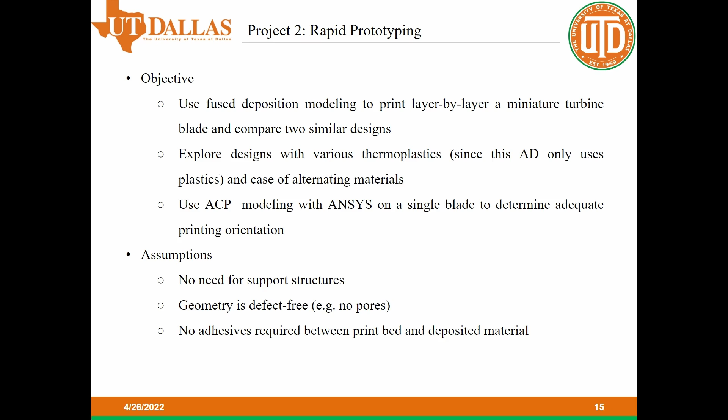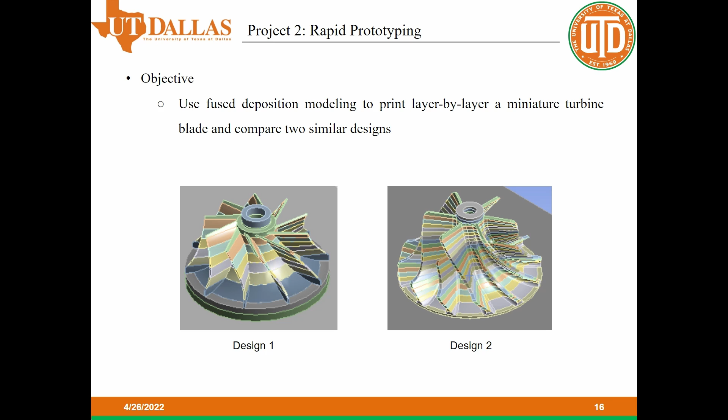Our assumptions going into this include no need for support structures, defect-free prints, and no adhesive required on the print bed. Here are the two different turbine geometries we tested, with Design 2 being a bit more complex, with alternating full-length and half-length blades. Design 1 is composed of 10 layers, while Design 2 is composed of 24 thinner layers, and this will be notable later on.

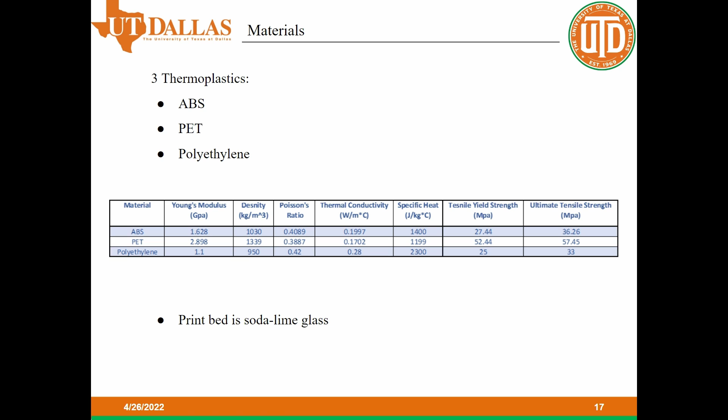The three thermoplastics we tested for the turbine composition are ABS, PET, and polyethylene, whose material properties are given in this table below. And the print bed itself is made of soda lime glass. Additionally, we tested alternating layers of ABS and PET for each design, and this actually gave some pretty interesting results that we'll see in a moment.

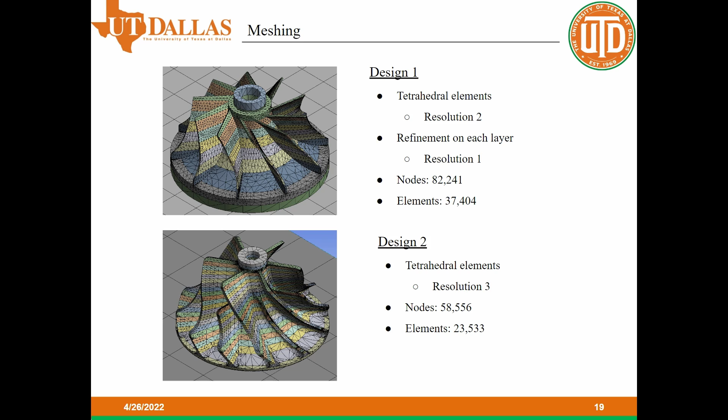The meshing strategies of Design 1 and 2 are somewhat different. They both use a tetrahedral mesh, but Design 1 has mesh refinements done at every single layer. Because Design 2 has more than twice as many layers, that same layer refinement could not be done due to the nodal limitations of the student version of ANSYS. However, we did increase the overall mesh resolution and ensured we had at least two elements across any thickness.

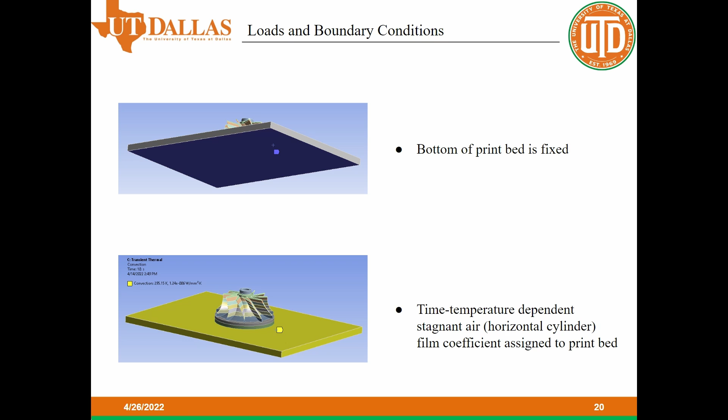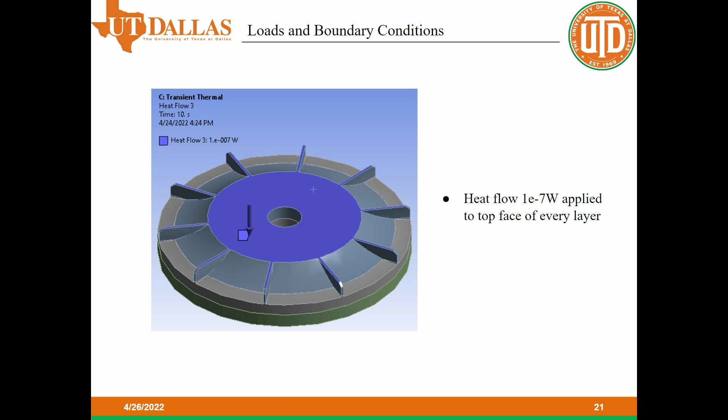For boundary conditions, the bottom of the print bed is fixed, and the stagnant air horizontal cylinder convection coefficient is assigned to the print bed. And these are the same for both Design 1 and 2. Our thermal loading is a heat flow of 1e-7 watts applied at every layer, and again, this loading method is the same for both Design 1 and 2. The FDM process was simulated using element birth and death relationships, and this animation shows the layer-by-layer addition of material.

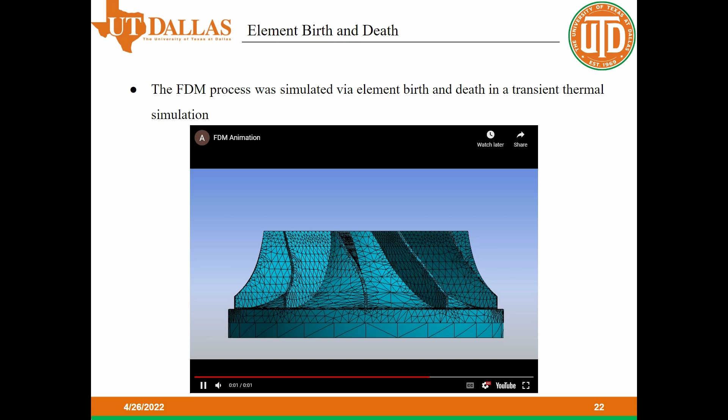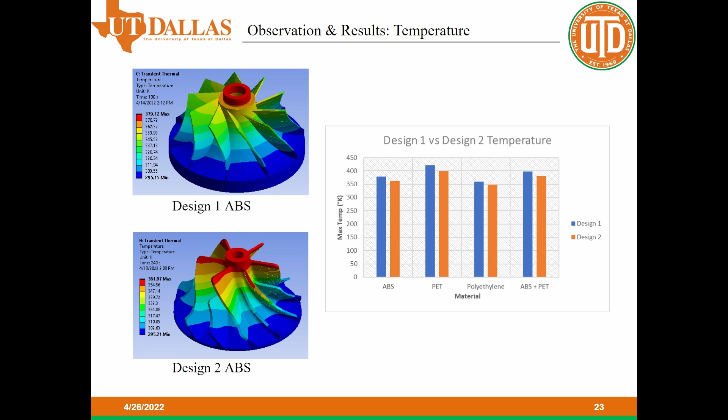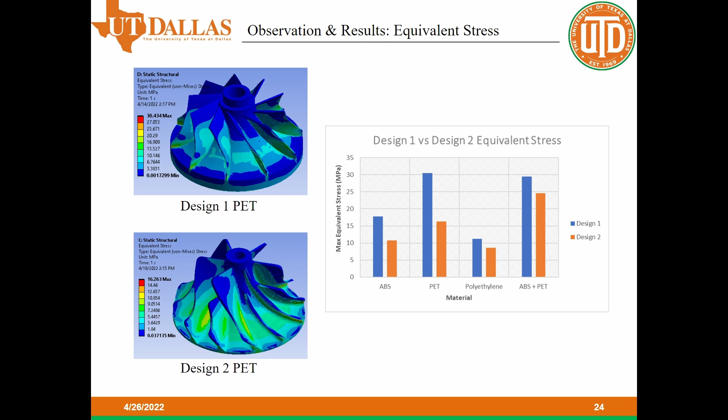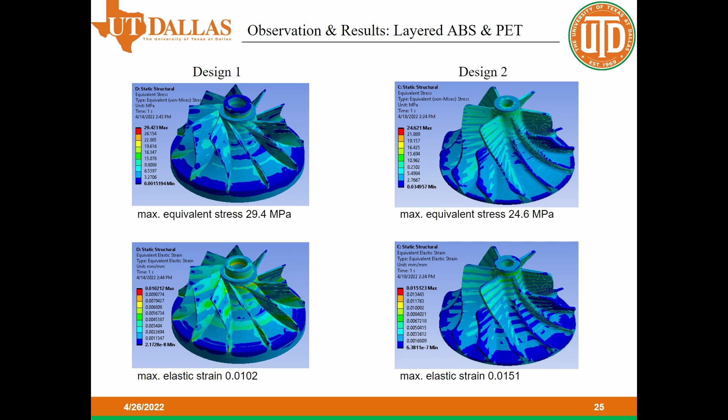The most interesting contours are the stress and strain plots for the layered ABS and PET turbines, with Design 1 on the left-hand side and Design 2 on the right. Design 2 has a slightly lower equivalent stress, but its elastic strain is 48% higher than Design 1. This is because ABS and PET did not experience the same amount of thermal expansion during the birth and death process.

This is an exaggerated view of the normal stress in Design 2. Every PET layer is under compression, while every ABS layer is under tension, and this is the result of their differences in thermal expansion. This effect is more pronounced in Design 2 because it has more than twice as many layers, so there are more than twice as many transitions from this tension to compression.

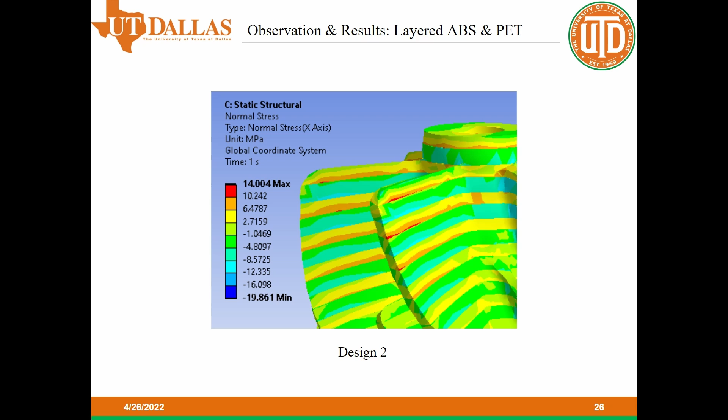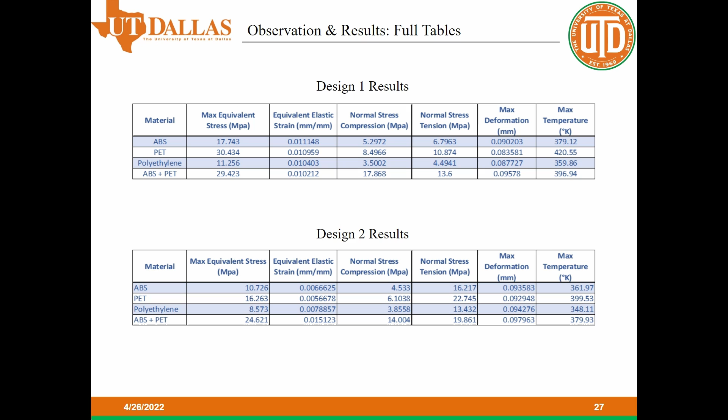The remaining results are tabulated in these two tables, and we included the maximum equivalent stress, tensile and compressive stresses, elastic strain, deformation, and temperature. In determining the best design and material, we chose to compare the safety factors of each combination. When comparing the same materials, Design 2 had the highest safety factor in every case. Of the Design 2 options, PET had the highest safety factor at 3.22, so Design 2 made of PET is our recommendation for the rapid prototyping application.

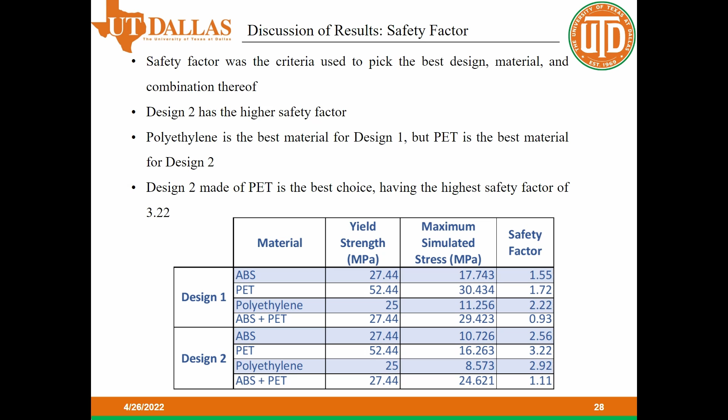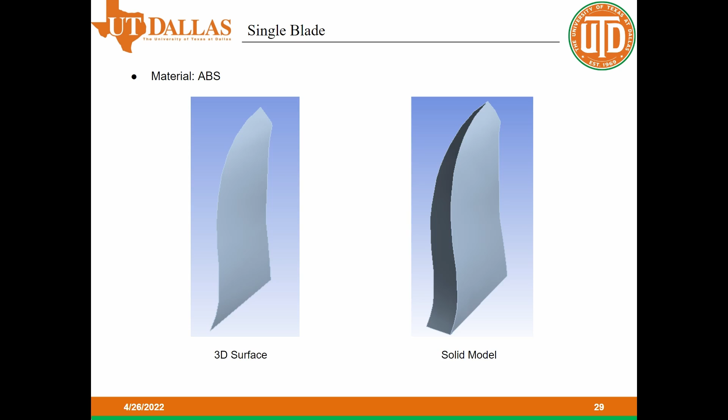We also experimented with the printing orientation on a single blade from Design 1. We were first given a 3D surface, which we extruded to a thickness of 1 millimeter. Using the ACP pre setup in ANSYS, we sliced the blade into 4 layers or plies of uniform 1/4 millimeter thickness. Using the symmetry option in the stack-up resulted in our ply angles going 0, 90, 90, 0, rather than alternating, but this was easily fixed by manually assigning the desired angle to each ply.

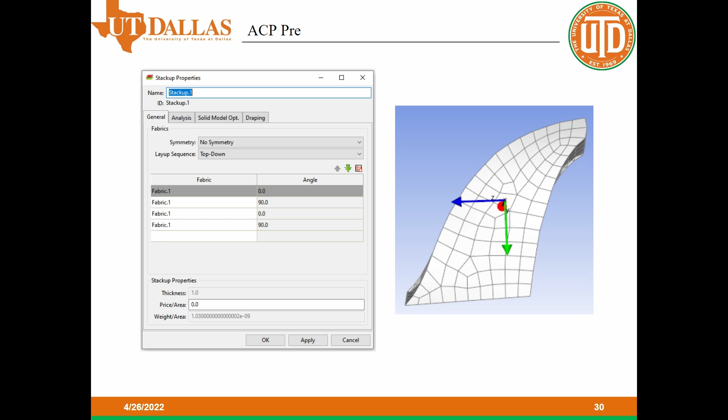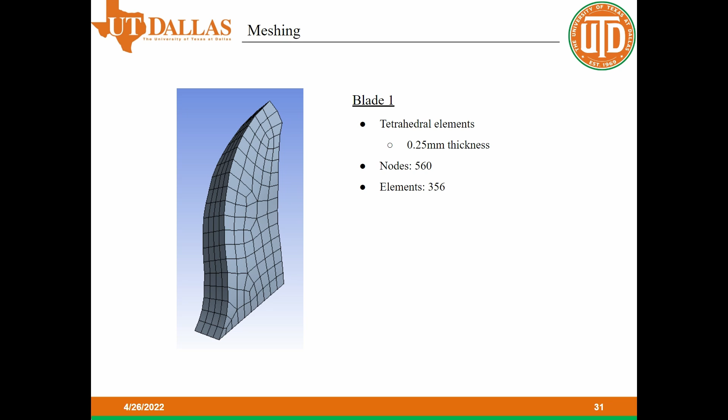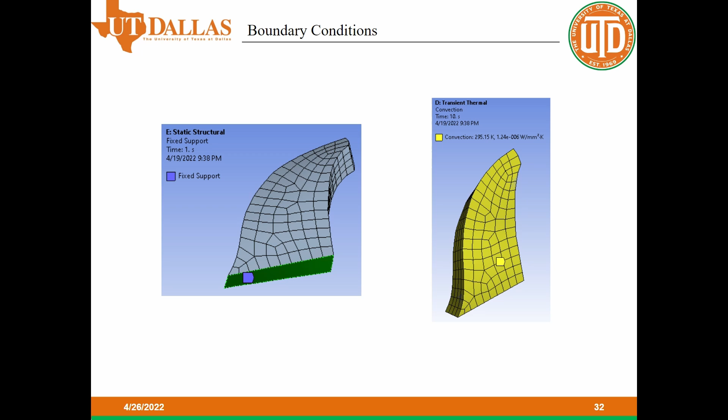The blade is meshed with tetrahedral elements, and the geometry is not nearly as complex as the full turbines were, so we don't need tens of thousands of elements to ensure accuracy in our results. The flat rectangular surface of the blade is held fixed, and the same stagnant air coefficient that was used for the turbines is assigned to the entire blade surface.

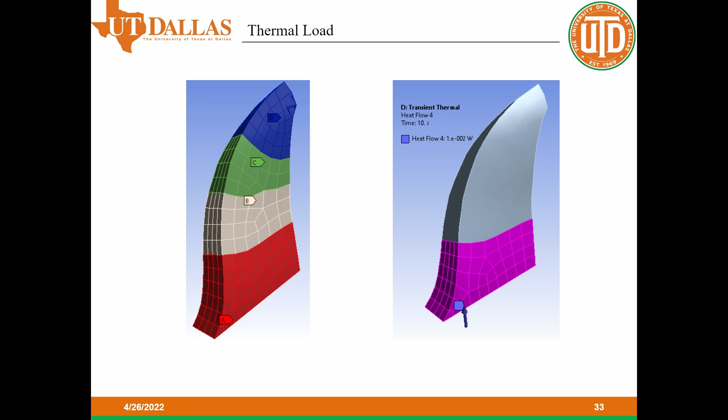The blade is divided up into 4 sections and assigned element birth-death relationships to simulate the FDM process, and each section is assigned a heat flow of 1e-2 watts. And here is a short animation showing the bottom-up printing of the blade.

So first, we look at the stresses present in the blade as a whole. There is a maximum equivalent stress of about 54 megapascals, with maximum compressive and tensile stresses of 11 and 39 megapascals.

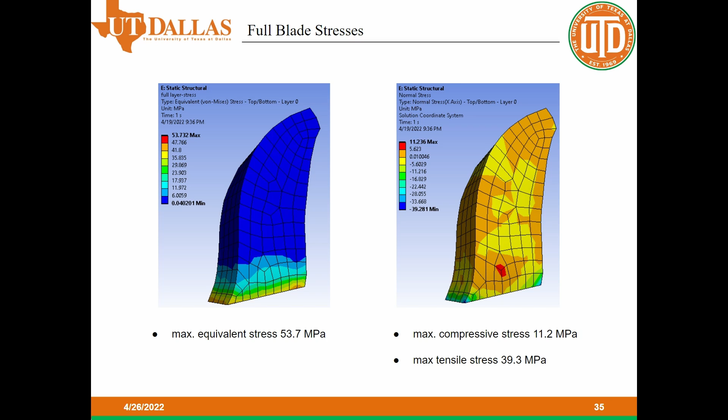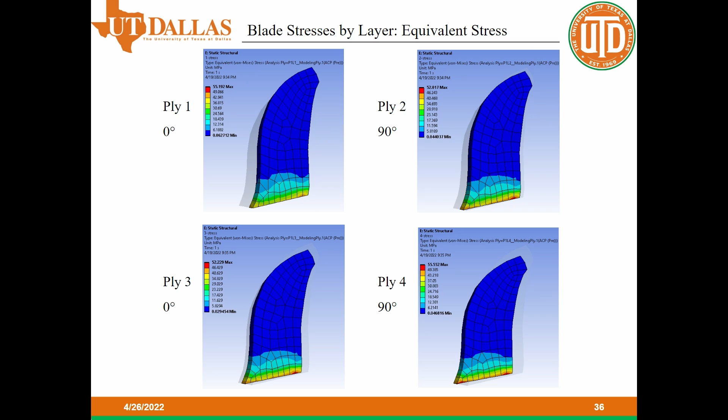Now we'll look at the stresses present in each individual layer. We can see about a 3 megapascal increase in equivalent stress of the outer plies, plies 1 and 4, versus the inner plies, plies 2 and 3. Because we need to compare apples to apples, the inner and outer plies are not directly comparable. Comparing the print orientations here, there does not seem to be a notable effect on the equivalent stress.

However, when we look at the normal stresses, the 0 degree and 90 degree raster angles result in a significant difference in the normal stresses. In the inner layers, ply 2 and 3, the 0 degree angle in ply 3 shows a slightly higher compressive stress, about 3 megapascals higher, but a drastically lower tensile stress of about 26 megapascals lower.

And this same pattern is seen for the outer plies, plies 1 and 4. Ply 1, the 0 degree ply, has again about a 3 megapascal higher compressive stress, while ply 4, the 90 degree raster angle, has about a 23 megapascal higher tensile stress. While the equivalent stresses were unchanged, the 90 degree plies have about 50% more tensile stress than their 0 degree counterparts, so the 0 degree raster angle is preferable.

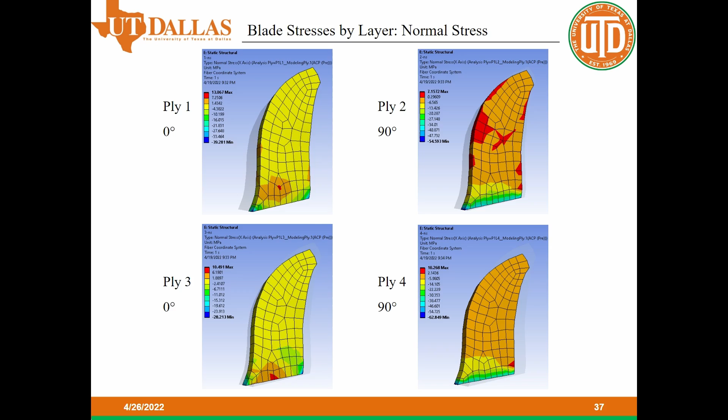This led to us wondering why the 0 degree direction was more favorable. We figured there were 2 explanations for this. Maybe the 90 degree print orientation resulted in higher stresses because it was perpendicular to our fixed support, whereas the 0 degree angle was parallel to the support. Or maybe printing across the width is preferable due to the geometry alone, unrelated to the relative orientation of the fixed support.

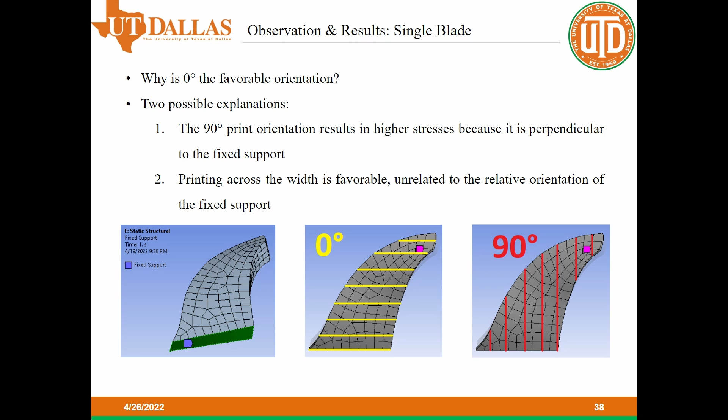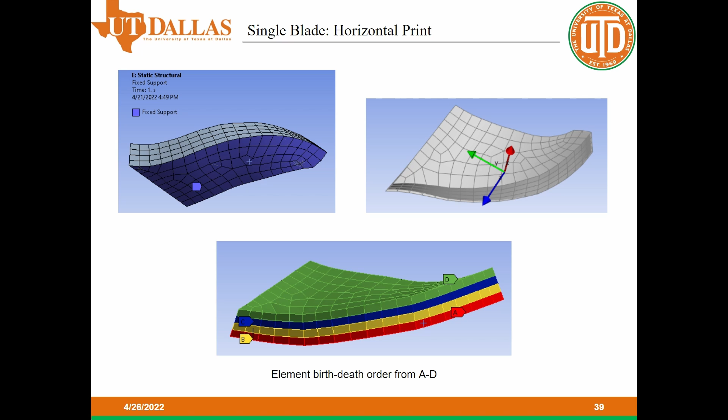We decided to simulate the blade being printed on its side, where each ply would be used as an element in the birth-death process. The fixed support was now applied to the face of ply 1. These are the only differences from our previously shown blade simulation. The 0 degree and 90 degree ply directions have not been modified in any way. They are just shown here to illustrate that they are now both parallel to our fixed support. Here's a short animation showing the modified printing process.

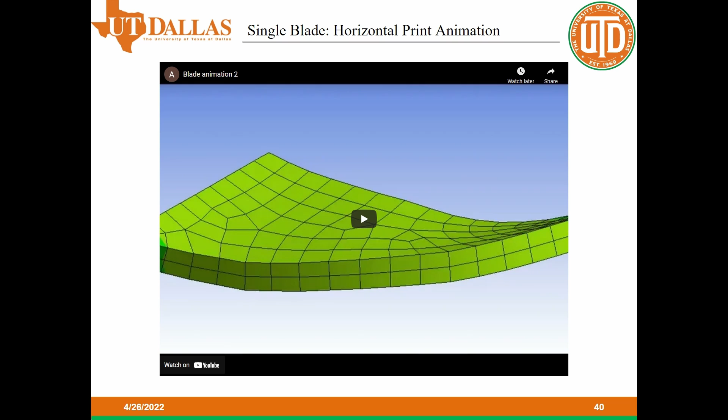The bottom ply being held fixed naturally led to stress concentrations that would not be present in the uppermost ply, so in this case, only the inner plies were compared to each other. This time, the equivalent stresses are significantly affected by print orientation, the 0 degree ply having a max stress 27 megapascals lower than the 90 degree ply. Again, the difference in normal stresses between the 90 and 0 degree raster angles is clear. The 0 degree ply has significantly lower compressive and tensile stresses.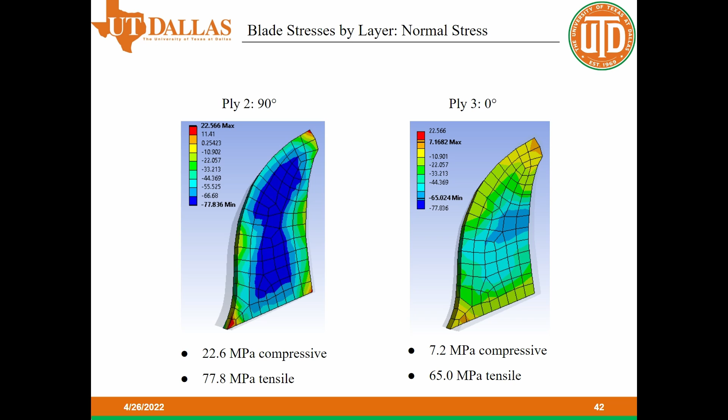With the boundary condition now ruled out as the driving force, we can conclude that the 0 degree print orientation is preferable based on the geometry of the blade. We believe this is due to the uniform length of the 0 degree raster lines. Their length varies less than those in the 90 degree direction. The 0 degree lines continuously and gradually decrease as they reach the tip of the blade, going bottom to top, whereas the 90 degree lines, going left to right, start short, grow very large, and then become short again. These changes in length occur much more rapidly than with the 0-degree raster angle.

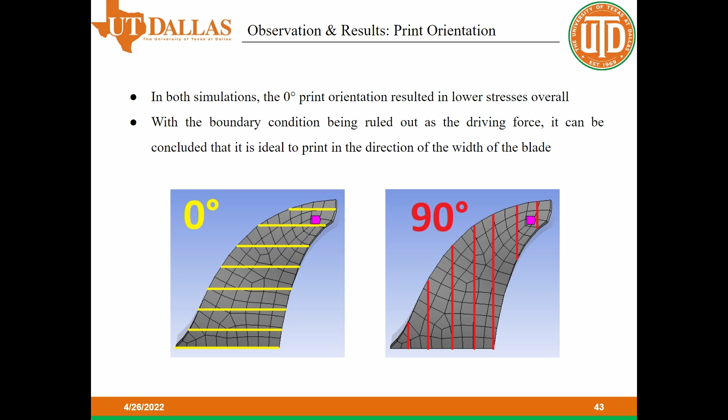To sum it all up, we found that Design 2 made of PET had the best performance due to it having the highest factor of safety out of all the combinations of designs and materials tested. Furthermore, we found that the best printing orientation was the 0-degree raster angle for the shape of our blade.